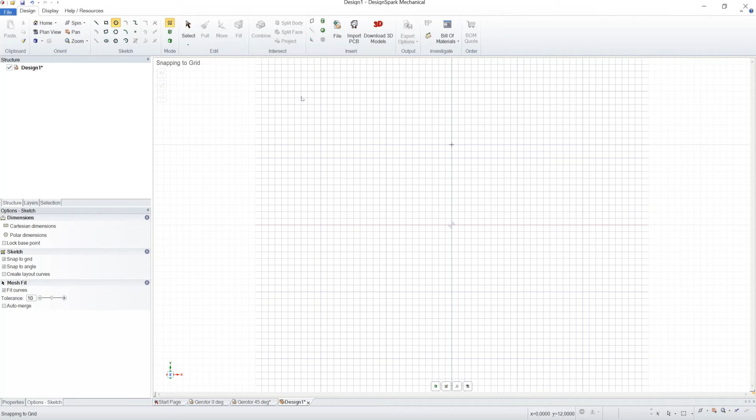Now we start with some circles representing the inner rotor. Let's take a radius of 12 and say 6 millimeters of the circles. Do this again and again and one more.

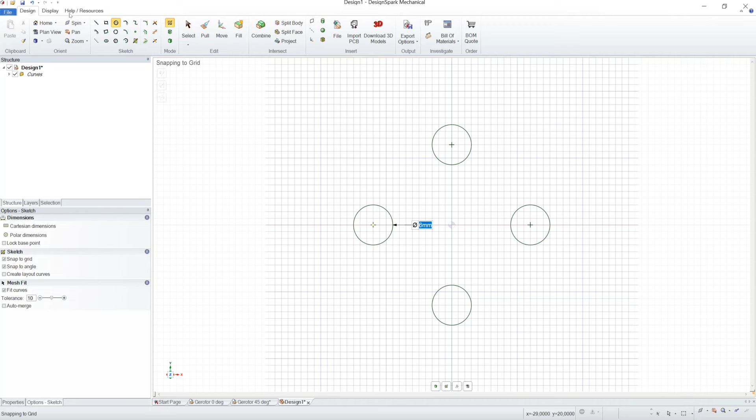So we construct a rather rough version of the inner rotor. We'll care about the rest later. So cut away what we don't need anymore.

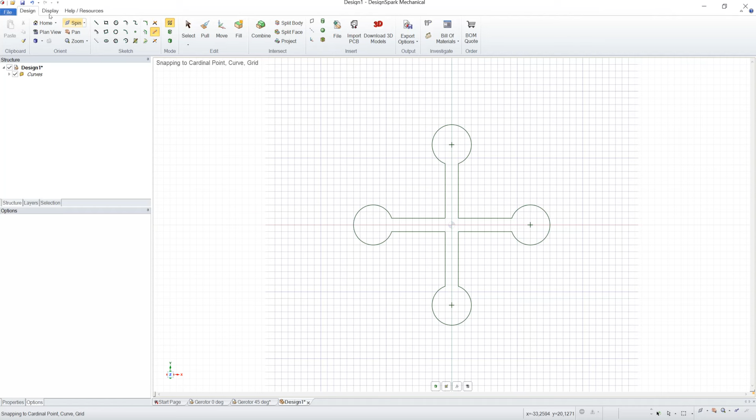Now we can start to pull. Let's make it say 8 millimeters. So nice, our inner rotor is complete so far. Let's rename it.

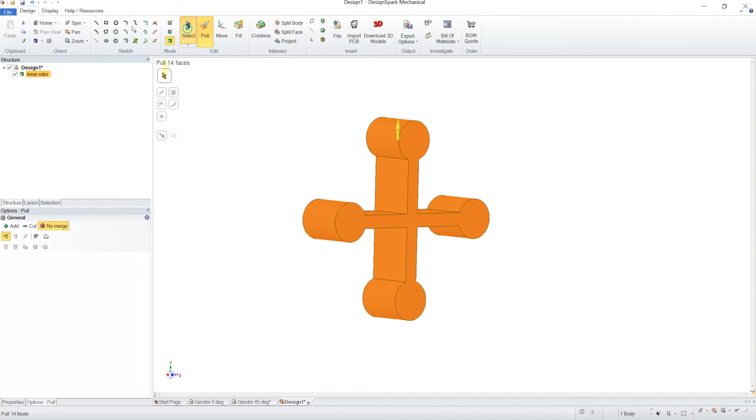So now we'll do a rough version of our outer rotor. First let's put some 2 points, center of the inner rotor and center of the outer rotor.

Let's take 3 millimeters, which is half of the diameter of the circles, or the radius of the circles. That's a good value for the distance between inner and outer rotor axis.

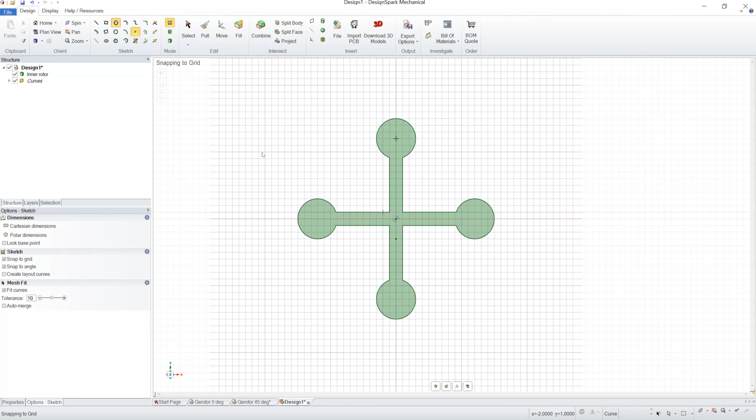So let's see where the outer rotor circles must be, and we'll first construct this part, that one, these two here, and that one we already have.

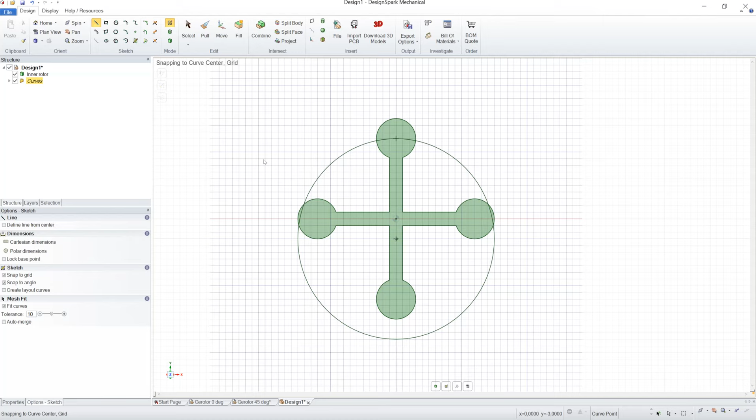First, the outer rotor is divided by 72 degrees, which is 360 degrees divided by 5, because we have 5 teeth. So I just showed the whole one.

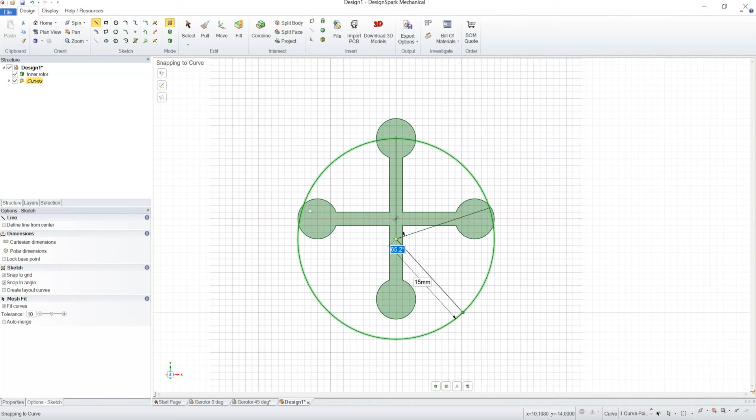Let's do some lines, construct some lines. One more. Here you have to put tab to get to the angle. So one more. Tab 72 degrees. One more. 72. Escape. 72.

So that's enough so far. Let's put the other just 2 circles, also 6 millimeters. So now we get to the interesting part.

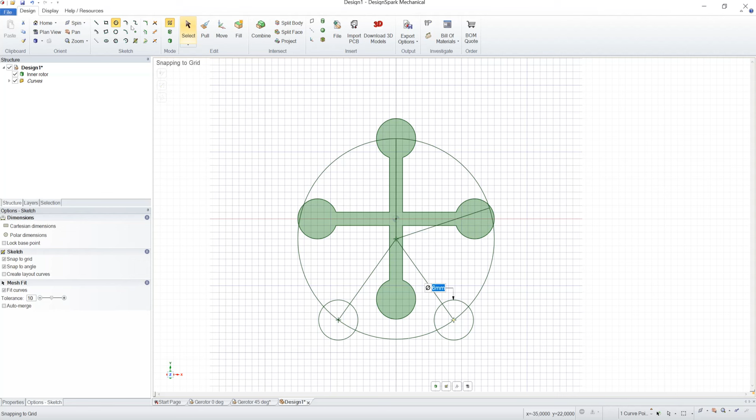Let's get a bit closer. So zoom in a bit more so we can see what I do.

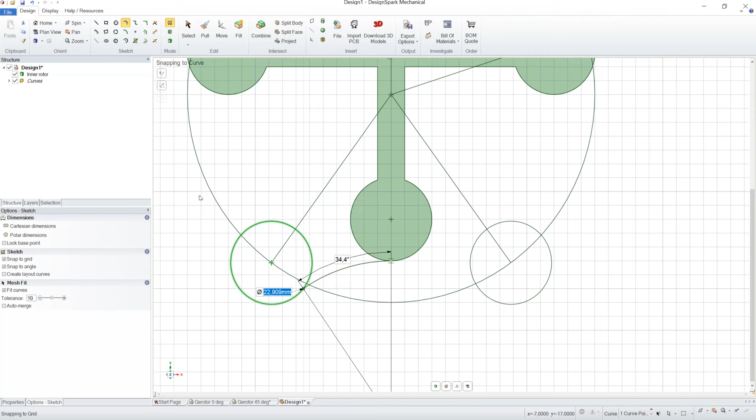So I do a tangent arc, tangent here. You see the two, a tangent sign here, also tangent sign. So it's tangent from here and tangent from to here. That's almost all we need so far for the outer rotor.

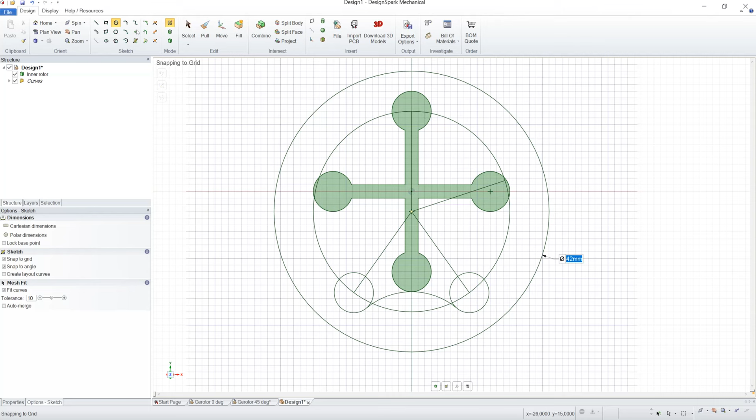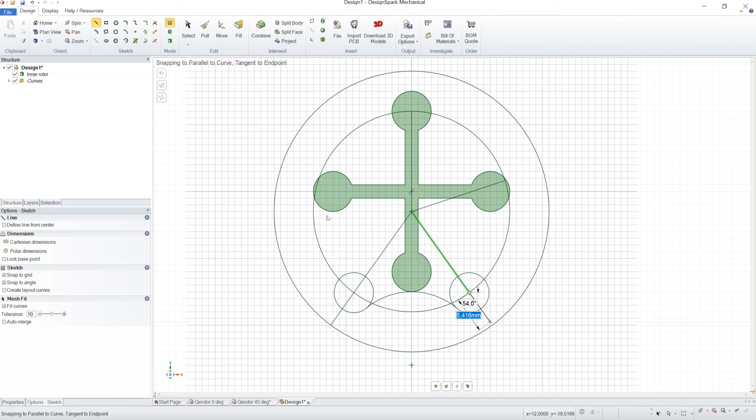So let's do another circle. 40. Let's make it 42. Now we have to add here 2 lines to get to the outer circle.

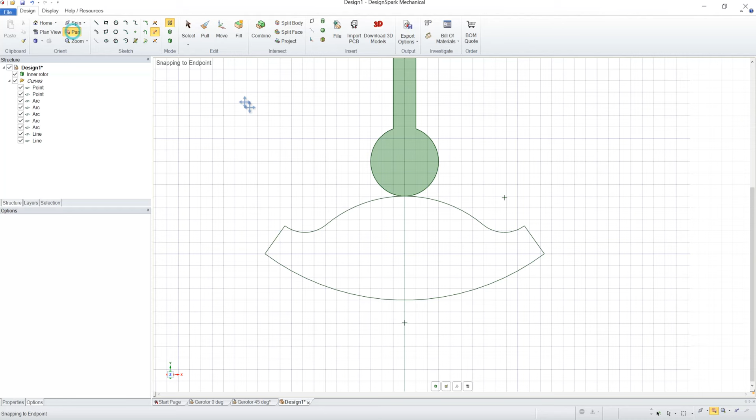So now we have one segment of our outer rotor, and now we can extrude it and then copy it. So first let's extrude it.

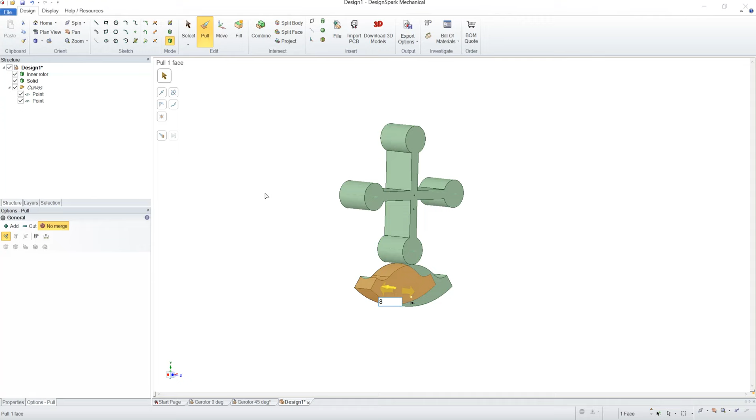Too. Nah, okay, let's look at it from this side, doesn't matter.

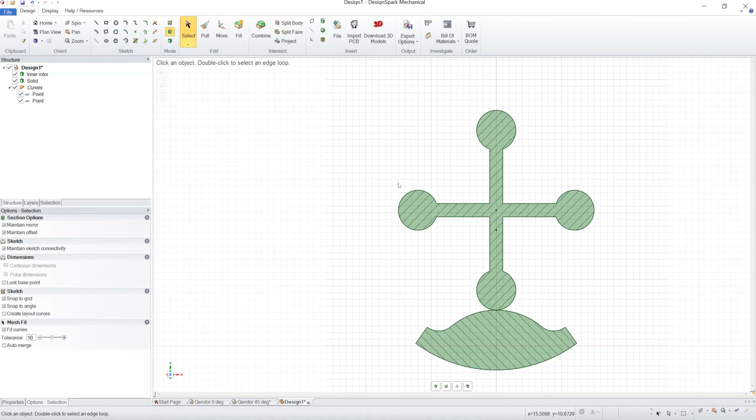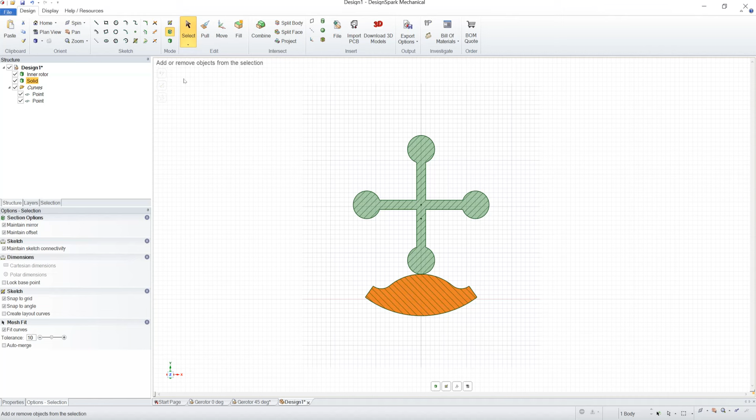So let's copy and rotate that part. First we select this one. I say we copy it first with Ctrl C, Ctrl V. So select this one, Control C, Control V, and we have another one.

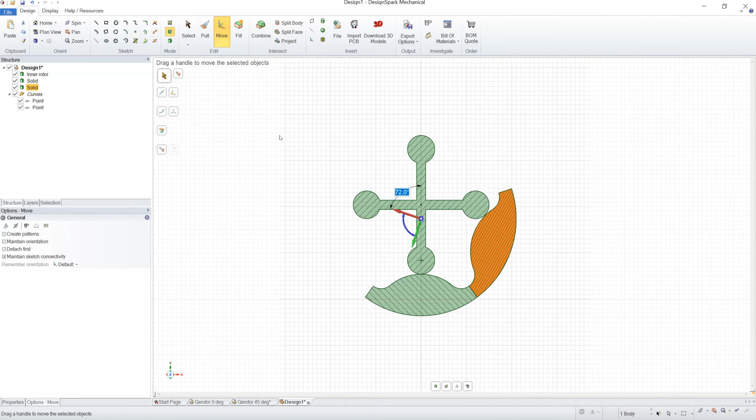So now we move this one, not from this position, but we move the center to the center of the outer rotor. So now we can move the copy, move it by 72 degrees. So now copy again, Control C, Control V, and continue rotating, once again 72 degrees.

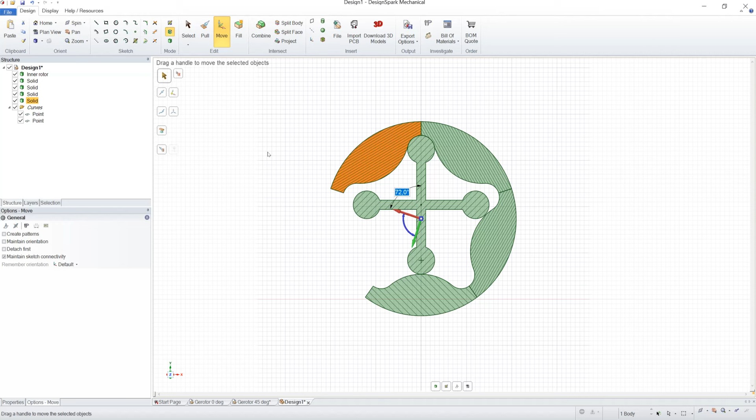Control C, Control V, rotate 72 degrees. And once again, Control C, Control V, and rotate. So it looks much more like the outer rotor as we imagine it.

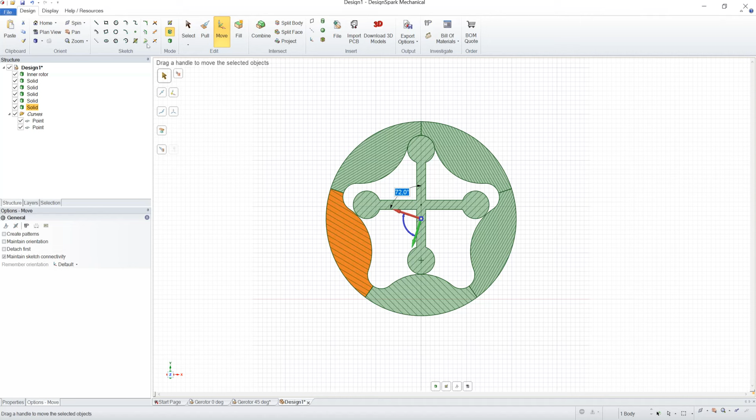So now we can make one part of these parts we copied. So select, just hide the inner rotor so as not to make a mistake. Combine, press Control,

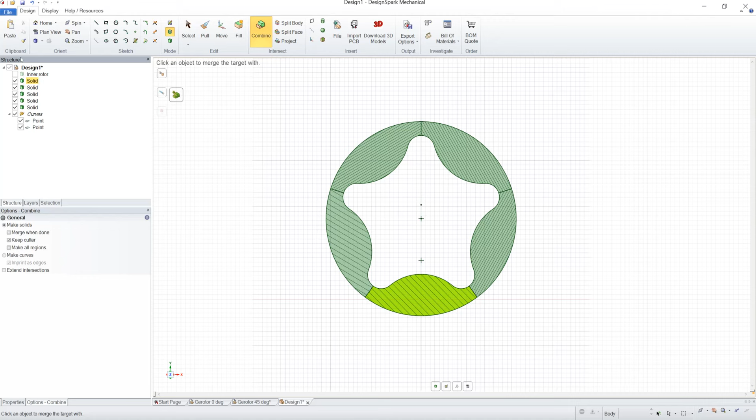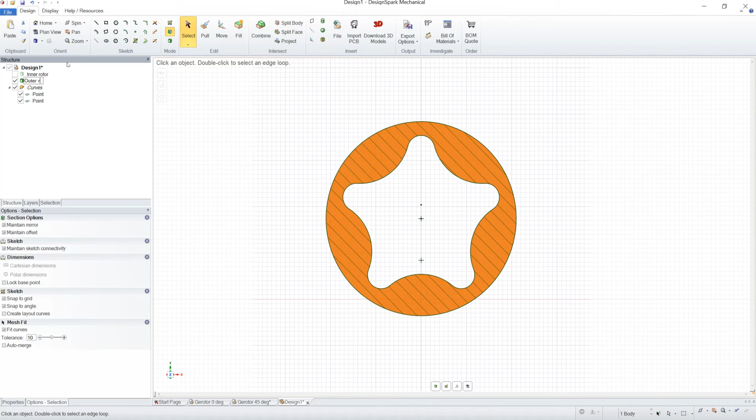No, take it from this side, it's easier. Here. Yeah. Okay, so let's rename that solid to the outer rotor. So that's fine so far.

Now the second thing we have to take care of, let's see, when we turn our gerotor for 45 degrees, it looks like this. And here we get that angle, or that line, and it must be tangent to the outer rotor at this place, and tangent to these two circles.

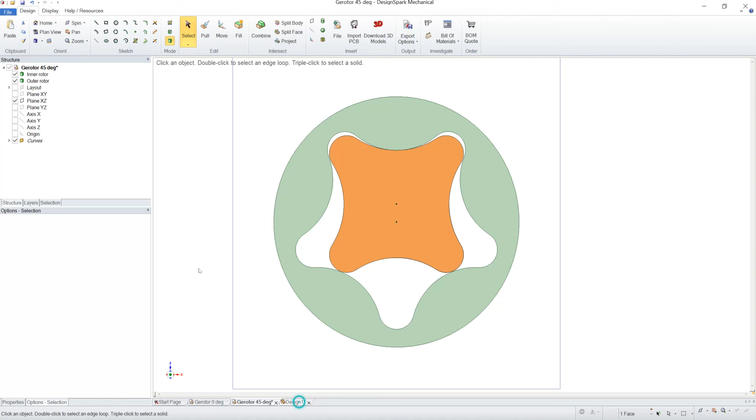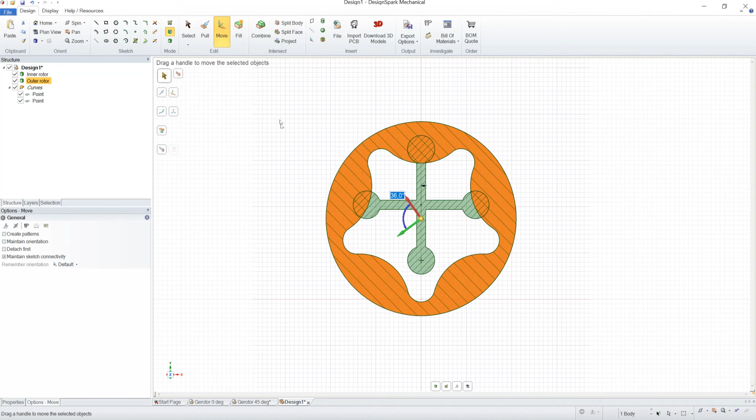So let's do this. For this we just rotate both the inner and the outer rotor. First let's take the outer rotor, rotate it by 36 degrees, or half of 72, and the inner one we rotate by 45 degrees.

So now we have the situation like here. And now let's construct the other side.

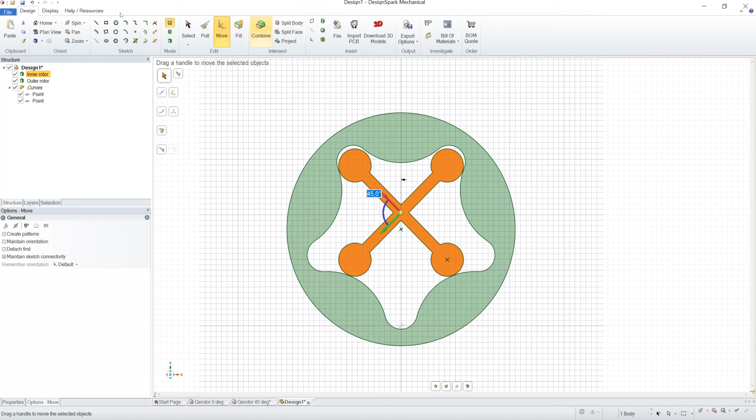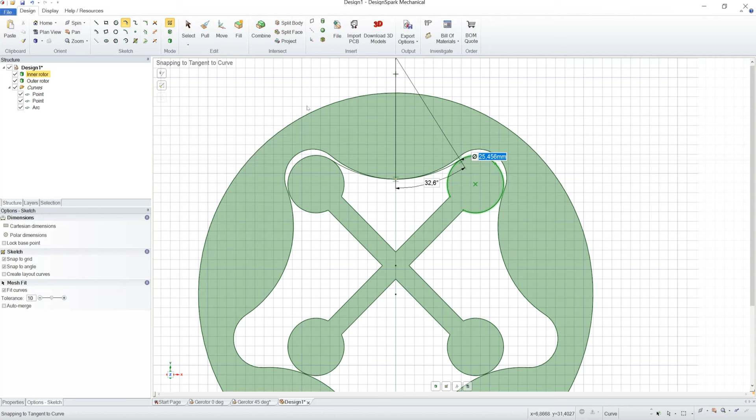So we take a tangent arc, must be tangent to here, and be tangent here. And tangent, tangent, tangent, you see the tangent sign? So we're done with this. The outer rotor we don't need anymore so far.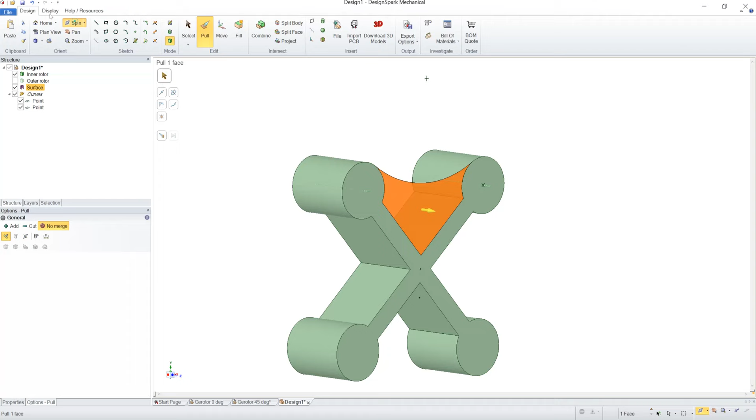So we can now extrude our new surface. Millimeters. Let's see if it is alright. Yep.

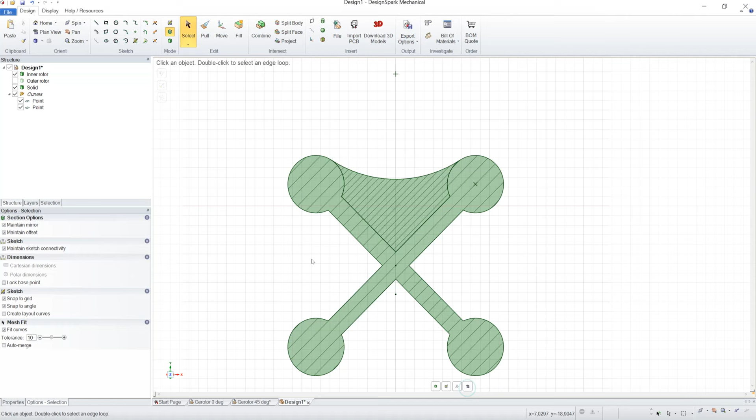And now let's do the same thing as we have done before with the other part. Just move. That's solid. From the center.

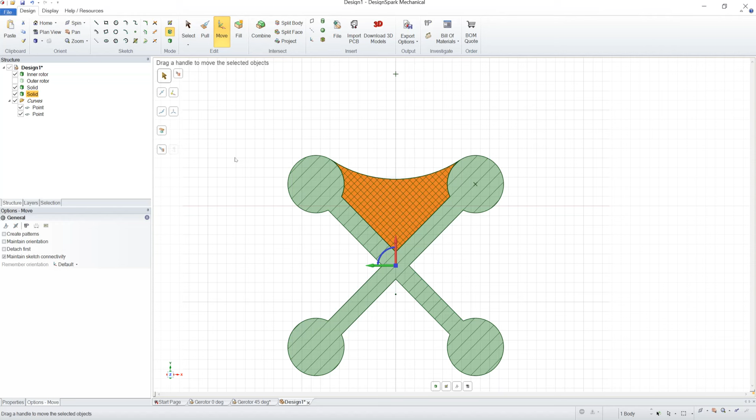Forgot to copy it. First copy it and now rotate 90 degrees. Nice, copy again, Ctrl C, Ctrl V, rotate 90 degrees, Ctrl C, Ctrl V, and once again.

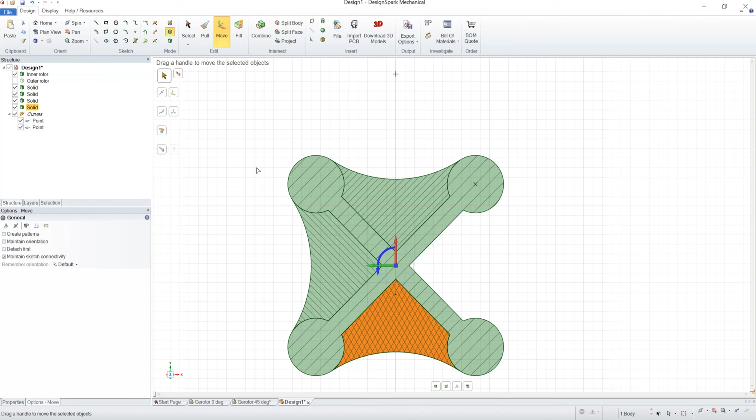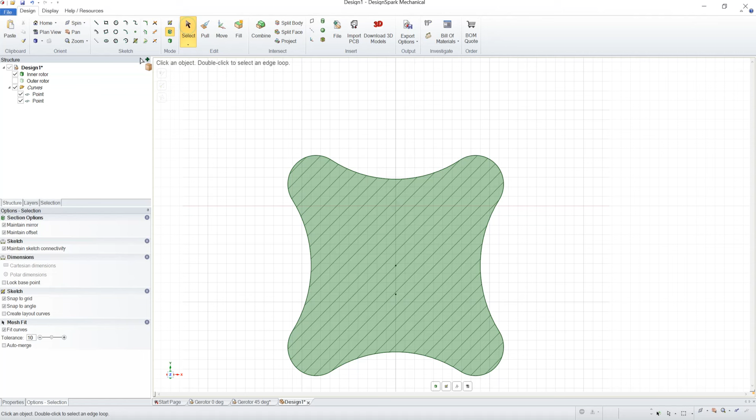So here we are. Now we can make it one solid. Oh, that's it. Ready.